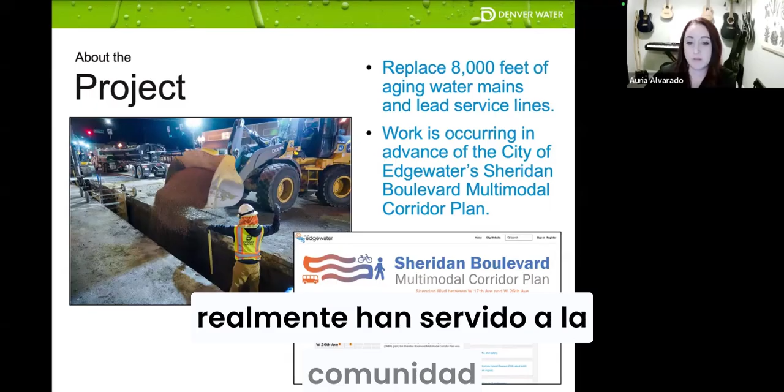So to kick us off, Auria will give us an overview of the project and tell us why this work is important. Thanks, Vanita. Good evening, everyone, and thank you again for joining us. At a high level, Denver Water's crews will be replacing nearly 8,000 feet of aging water mains along Sheridan Boulevard. This work will occur between West 13th and West 29th Avenues. These pipes have really served the community for decades, so this project is going to help ensure that they continue to deliver safe and reliable water for years to come.

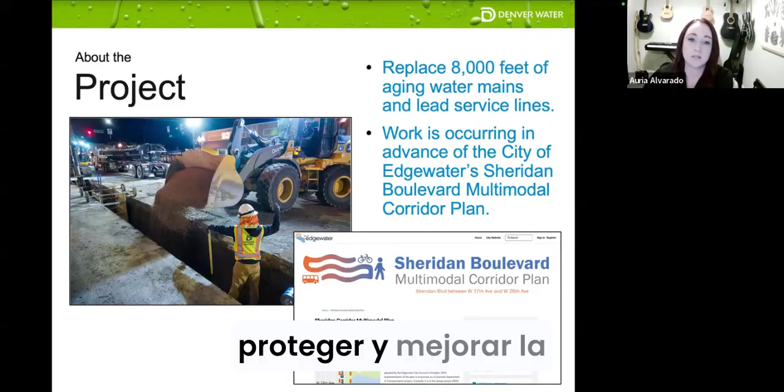Now, the timing of this work is closely tied to the City of Edgewater's multimodal corridor improvements. By coordinating that now, we're hoping that we can protect and upgrade the underground infrastructure before major above-ground improvements take place, avoiding future disruptions and saving time and money for everyone.

By completing this work, we're going to make sure that we protect water quality and reliability by replacing this aging infrastructure. We're going to be reducing emergency disruptions and costly repairs, which means fewer unexpected outages for homes and businesses. And we hope to minimize overall construction impacts by getting Denver Water's work done prior to the upcoming corridor improvements. It'll allow their work to move forward more efficiently and reduce repeated closures and inconvenience along the corridor.

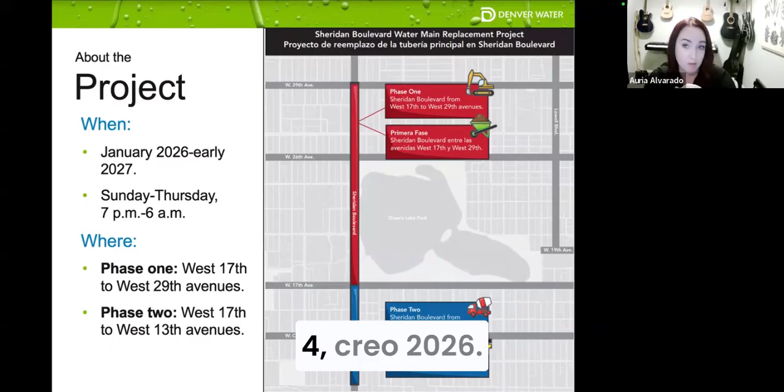Here's what you need to know about this work and when it will happen. The schedule is currently set to begin January 4th, 2026, and this will last through about early 2027.

Our work hours will be mostly at night, Sunday through Thursday from 7 p.m. to 6 a.m. The goal is to help limit daytime traffic impacts and business impacts along the corridor, but there may be some weekend work required throughout this project.

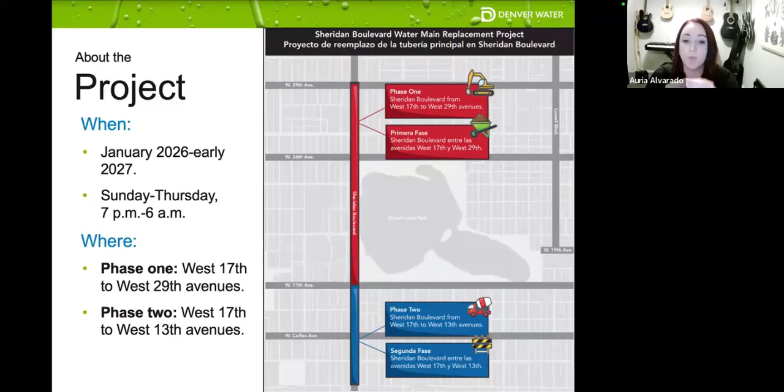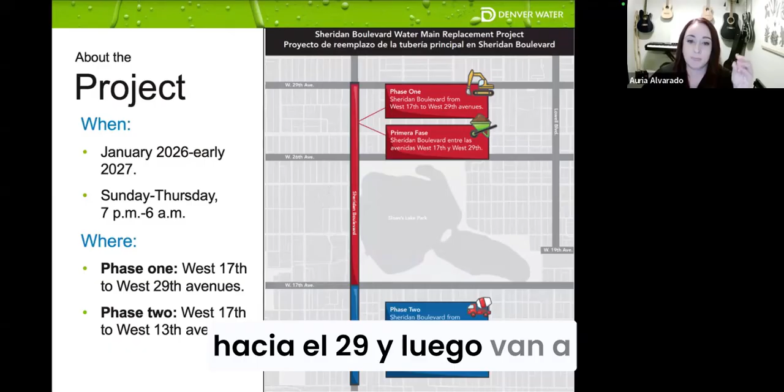Our approach is that our crews install water mains uphill to prevent air pockets from getting into the pipes. 17th Avenue is a bit of a low point in the corridor, so phase 1 will begin at 17th. They'll work their way north towards 29th, then jump back down to 17th and work their way toward 13th for phase 2.

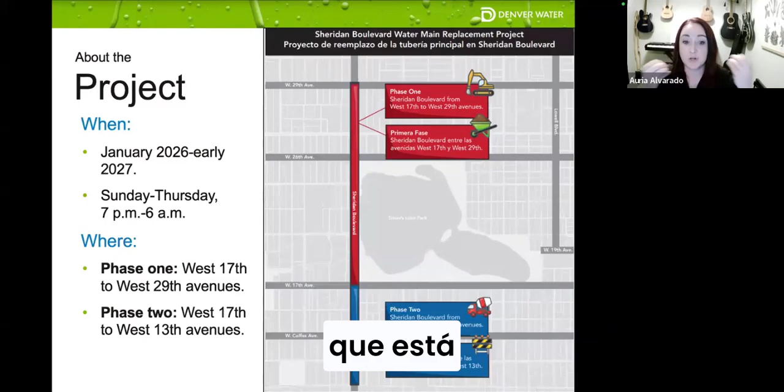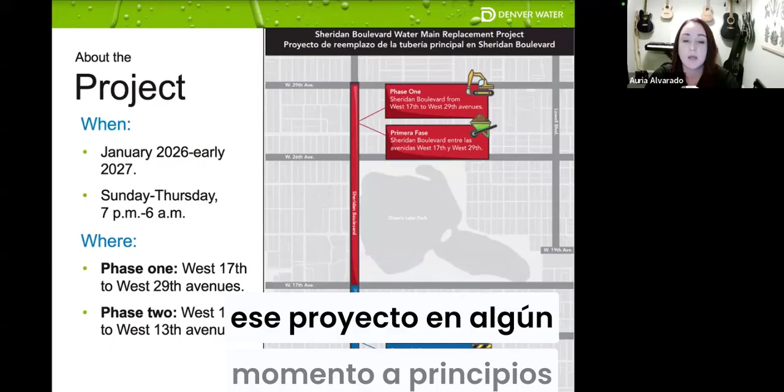I'd also like to call your attention to the fact that Denver Water crews are currently working along Zenobia Street between 12th and 14th Avenues. This is a separate pipe replacement project that's currently happening, and the work is occurring during the day. They started there early November and will be working along Yates and Xavier within the coming weeks, but we expect them to wrap up that project sometime early next year, so you shouldn't see too much overlap.

Mari, would you mind going over how we plan to keep folks informed throughout the project?

Yes, thank you, Auria. We know communication is key. Before work starts, we want to make sure you have the latest updates through multiple channels. You may have already received some project communications or may have seen us out in the community promoting the upcoming work. To keep you informed, we have shared updates via email, newsletters, website updates, and project timelines with progress.

We've also done mailed notifications and door hangers for properties directly impacted by the work, direct outreach to businesses and multifamily buildings to address their unique needs and minimize disruption, posts on Nextdoor to keep the broader community informed, and community meetings where you can ask questions such as this one.

Our upcoming in-person meeting will take place Wednesday, December 17th at 5:30 p.m. at the Active Adult Center, located at 6363 West 35th Avenue in Wheat Ridge. We also will be holding more virtual meetings and options available before phase 2 begins.

Now I'm going to hand it back to Benita for a brief Q&A before we break and talk about impacts and what you can expect before, during, and after construction. Thank you so much, Mari.

All right, that's the big picture for the Sheridan Boulevard water main replacement project. Now we'd love to hear your questions. To keep things focused and productive, please stick to what we just covered — things like the project scope, timing, phasing, how this project is tied to improvements in Edgewater, and how to stay informed. We'll take some of these questions now.

I'm going to hand it over to Austin to talk about what happens before, during, and after construction. Yeah, we'll go through what's going to happen before, during, and after.

Before construction, before we're actually out there replacing water main, if you have a lead service line and are enrolled in our lead service line program, one of our planners will be by to perform an in-home consultation. A lot of this is already done. We still have a few homes to get into, but our goal is to get in, chat with you about the program, explain the project, see where your water service line comes into your home, and verify the material for what is coming through the wall.

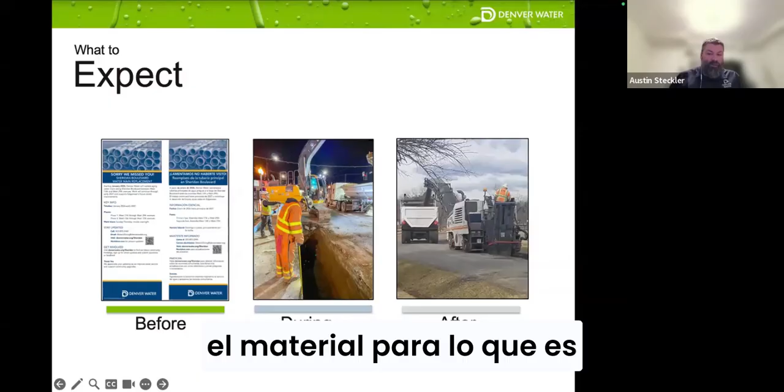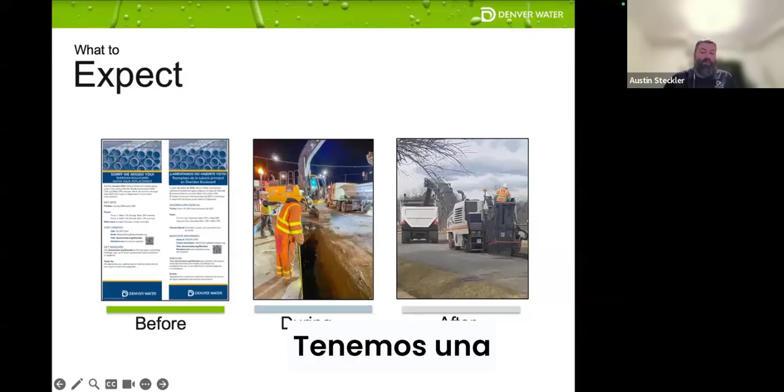There's also a little bit of other work where we need to install a fire hydrant to help with groundwater. We have to do a treatment process when we're in groundwater, and we need the fire hydrant to mix clean water with the groundwater so we can treat it. That will be happening tomorrow night. There will be some valve work up at 26 — we have a bad water valve that needs to be replaced — and some vault work happening up there too.

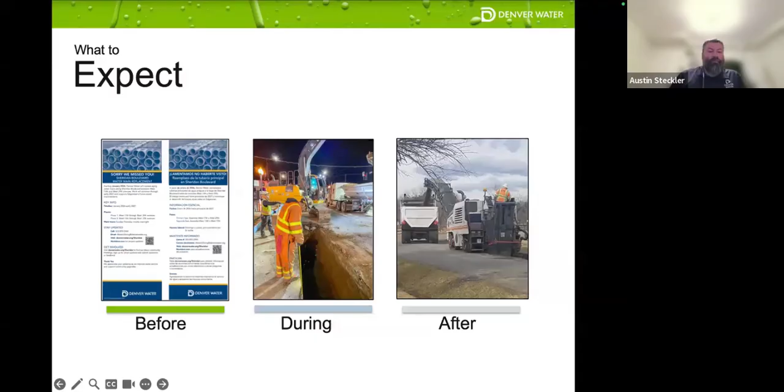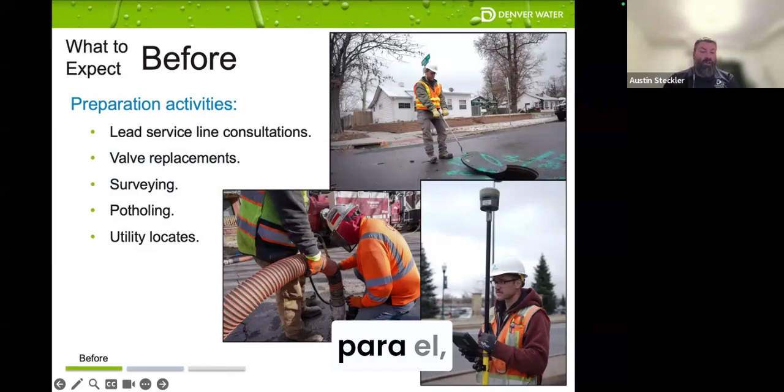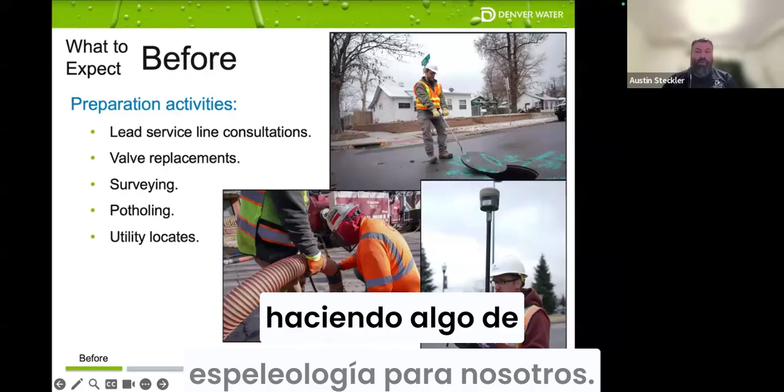Surveying and potholing: our potholers will be verifying service line material for the service lines enrolled in the program. That should be starting within the next week. Recon is our vendor, so they'll be out there during the day doing some potholing for us. You'll see some paint on the ground for surveying and utility locates, and that will all happen before we're out there putting in water main.

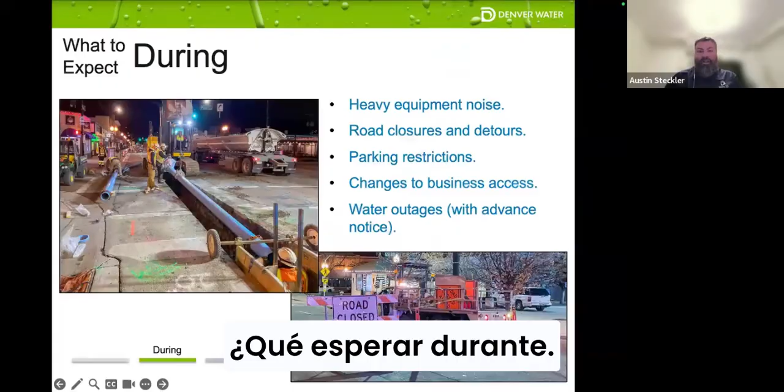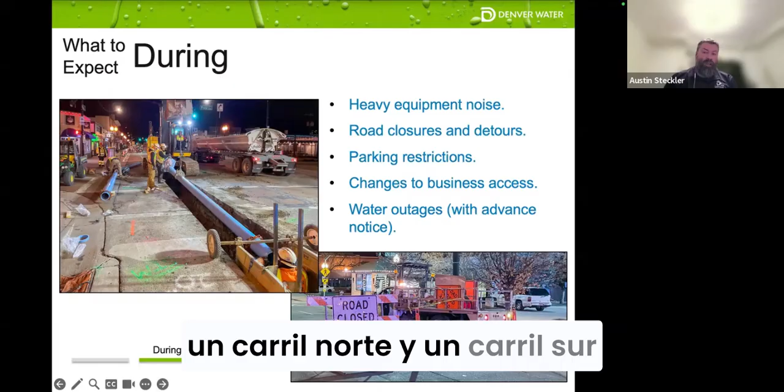What to expect during: the majority of the project will be in the northbound lanes of Sheridan, so we'll have those lanes closed. Traffic will be in the southbound lanes, so there'll always be a north and a south lane available on Sheridan, however they'll just be, for the most part, on the southbound side.

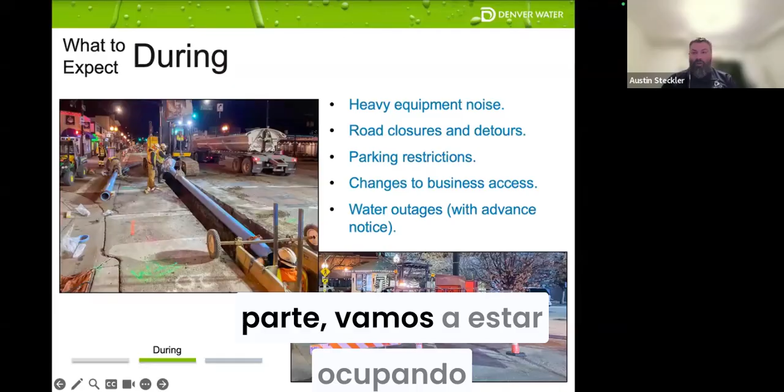When we do a couple of the service line replacements, we'll be in both the north and southbound lane, and traffic will be in the middle. But for the most part, we'll be occupying the northbound lanes. At night our permit is for 7 p.m. to 6 a.m., so we'll start shutting down the road at 7 p.m., perform our work, and be off the street by 6.

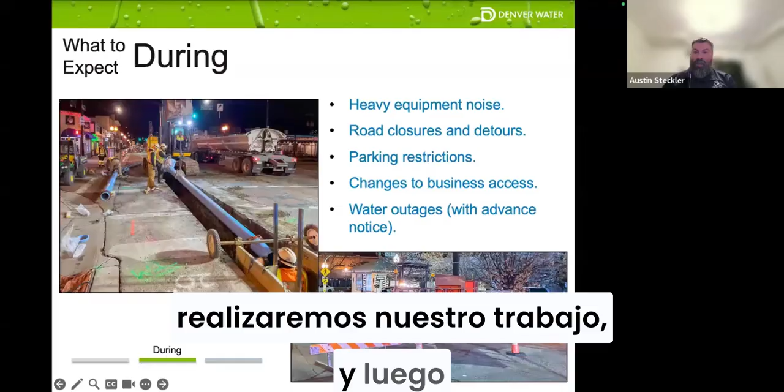There will be parking restrictions, although there's not a lot of parking on Sheridan, so it's not much of an impact there.

A few business access things: the businesses on the west side of Sheridan, while we're out in front of you, people heading northbound won't be able to take a left — they'll have to go down, turn around, and then they'll be able to get in if they're heading southbound, because traffic will be on that side. But there will always be an available way to get into your business. We'll have flaggers out there if needed to make sure people can get in and out.

Water outages — like we talked about earlier — if you're in a water outage area, you'll probably experience some. If you live a block or two off of Sheridan, you will probably never see a water outage with this project.

Other things during this replacement: for the lead service line replacements, we will be talking with you individually, but basically we will be replacing the service line from our water main into your home. That will happen at night, and we'll coordinate with you to get in there and perform that work.

After the project, we will be paving behind us every night, so our trench will be paved and the road will be drivable. Concrete and landscape will also take place.

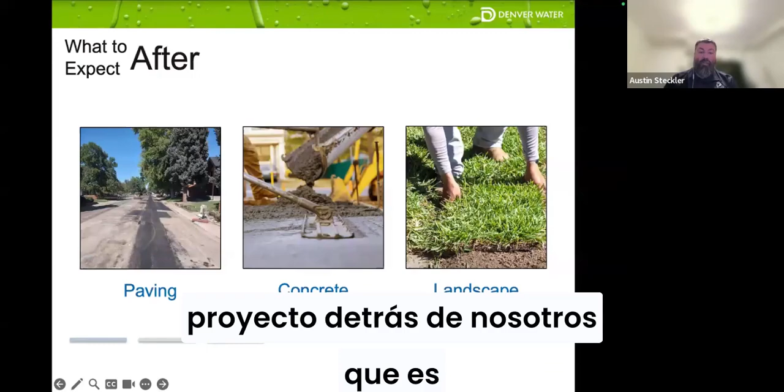With the paving, we'll pave our trench back every night, and then there will be another project behind us happening from 17th to 26th doing some different road improvements. Then outside 26th to 29th, and 17th to 13th, when weather allows, we'll be back to do a full lane mill and overlay.

We'll mill 2 inches off the road and put back any lanes that we dig into, and that work will take place down the road after we already have the water main in.

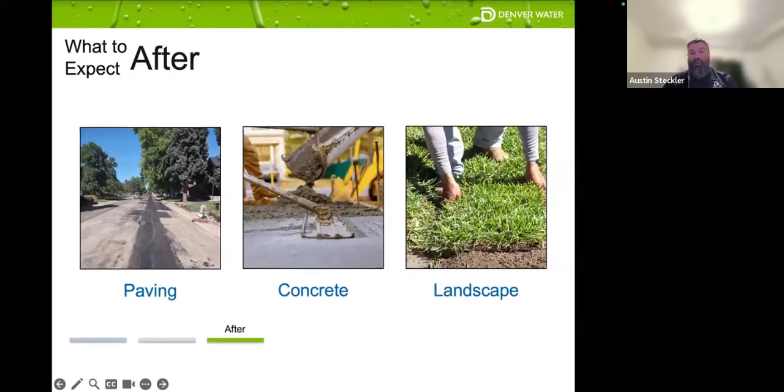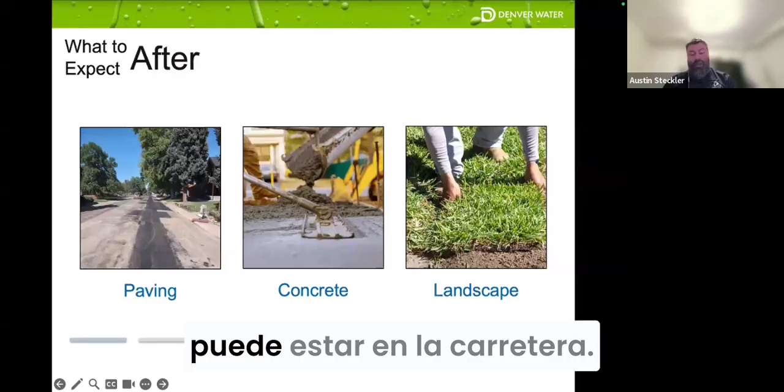Concrete work will typically take place during the day, so we only need to occupy one lane to put back curb and gutter, and CDOT allows you to be in the road with just a one-lane closure. That will also take place down the line.

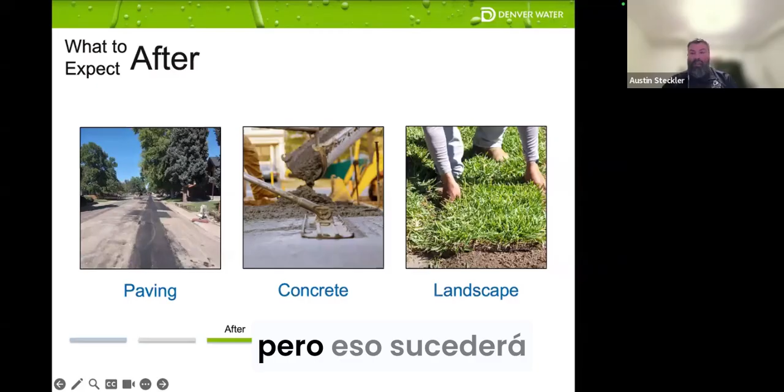We temporarily put back asphalt where concrete goes because we can put down asphalt in the winter. Concrete we typically wait till the spring to put back, but that will happen in the spring.

Landscape-wise, there's not a lot of work. We will be putting a couple hydrants in along Sloan's Lake, so we'll tear up some grass there, and there are a few other properties with some landscape. All landscape work is done April to October, when we put sod down, so you'll see our landscapers out during the warmer months when we can actually put grass down.

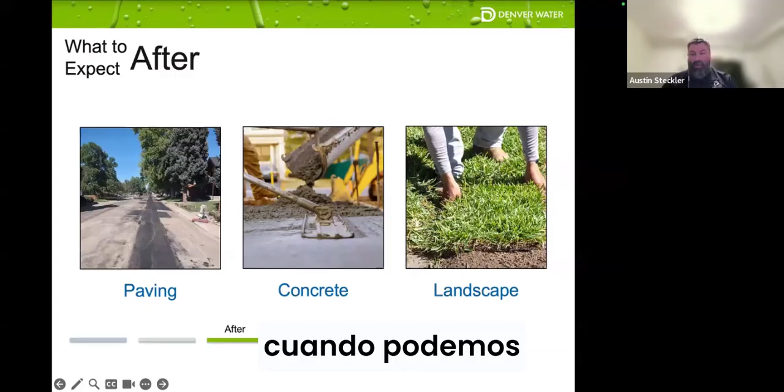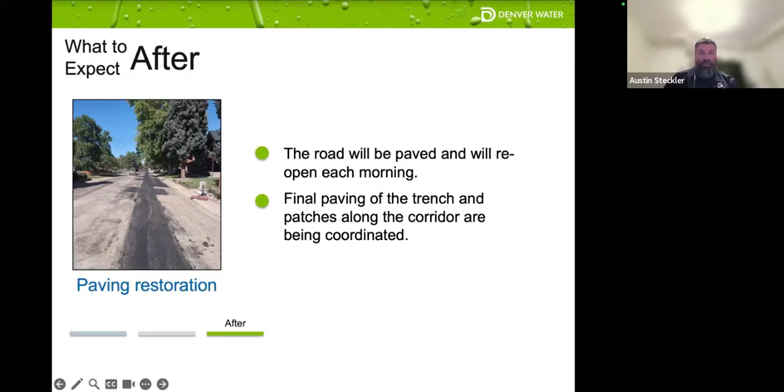I think our slides were a little behind his talking, so... oh.

Here's some beautiful pictures of the restoration. Oh, there's landscaping. And now we're up for the Q&A.